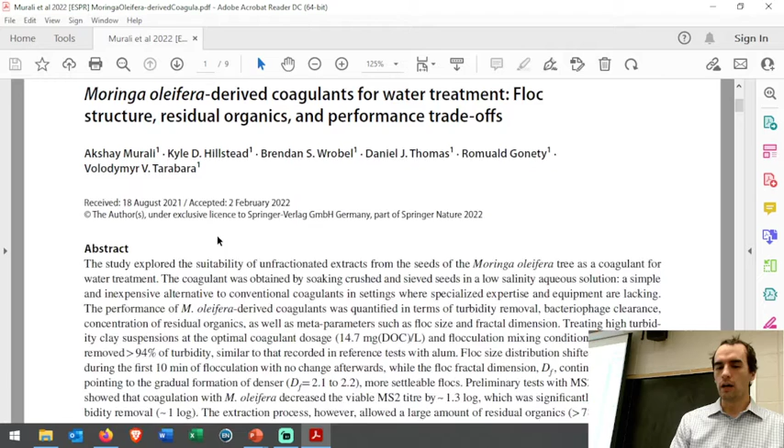I left you with sort of a participation homework assignment to read this article. Part of me wishes I gave you a little more specific instructions on what exactly to pay attention to, but I think I'm going to give you most of the credit just for participating in the quiz anyway, so I don't feel too bad. And also, I think it's a good place to start thinking about how you actually approach literature to find some sort of information, right?

So I talked to you a bit about this stuff in class, but I didn't cover every single specific detail about it. And so maybe you want to know, well, how good at virus removal is it? Is it going to remove any viruses? Is it going to be 90%, 99%? What is it going to do? So you might have that type of question in your mind when you're doing your research papers, and so this would be a great lesson, so to speak, on how to deal with research articles.

And I would always recommend first taking a look at the abstract. You might not understand everything that's there, right? I don't even understand everything in the abstracts when I look through them. That's something that happens very commonly when you're looking at academic research. There's a whole language ascribed to this particular topic. If you get into coagulation, sedimentation, and interparticle dynamics, it's kind of a language set that you have to learn. If you get into some other field, it's a different language set.

You go over to computer engineering. They have their own language set, right? Not to mention computer languages. So if you think about it like a language, it makes sense that there's going to be vocabulary where, okay, I don't know what that means. But by starting with that approach, you can start piecing together, oh, it's referring to something in light of this, so maybe I really need to figure out what that one particular word means.

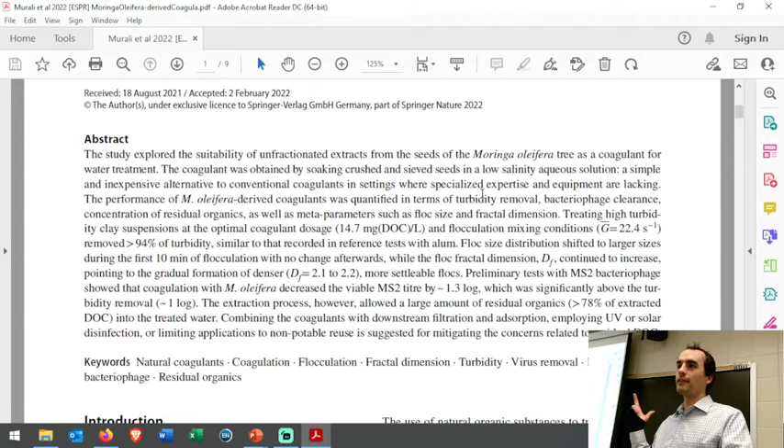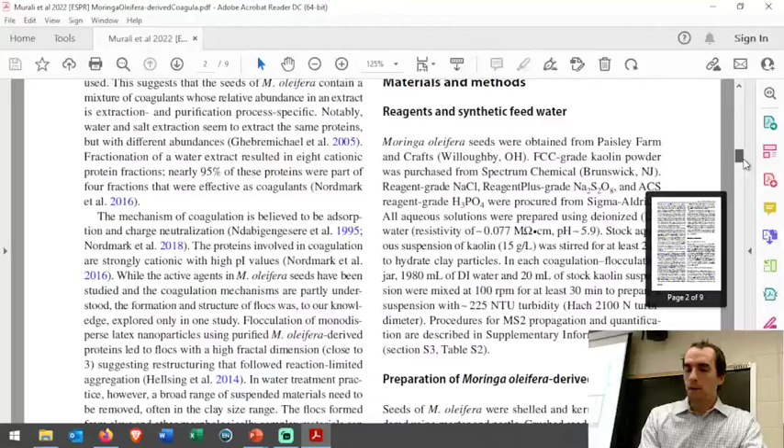Depending on your level of interest, how much information you need out of it, that's going to kind of tell you where else to look. Probably look in the conclusions. It'll expand on the abstract in terms of really what they found. But if you needed to know how they did something, if maybe that's what you're looking for, like, oh, did they use this method, maybe you're working in a research lab and you're trying to figure out how to do something, maybe it's a senior design project, then you probably know something about it already and you're looking for extra help, and then you might check the materials and methods, right? So that might be one thing.

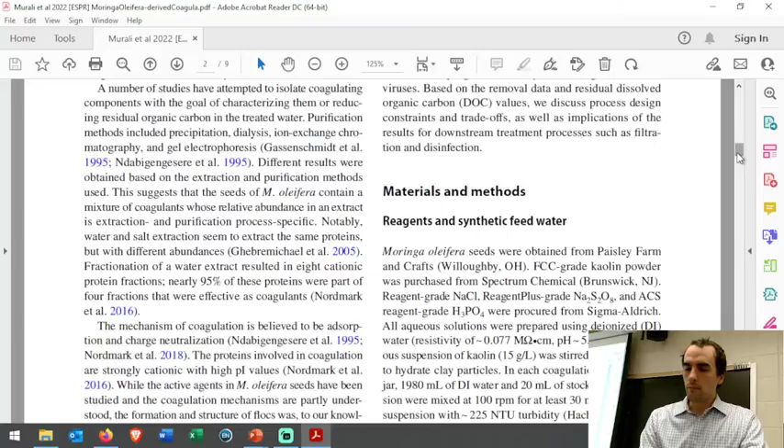For what I was interested in, you getting to understand the system and Moringa stuff, maybe you could extract some info there, but more likely I was thinking you'd take a look at the abstract, maybe the intro for a little more context. Especially the last paragraph of the intro tends to be very helpful to understand really what the paper is about. Typically an introduction, and this can be true for your papers as well, your introduction is going to be context leading up to why what you're going to say matters, right? So you're going to build up the story. This is known, that is known, but researchers really haven't delved into this, therefore we did this paper. That's kind of an introduction, and that last paragraph typically is, therefore we did this.

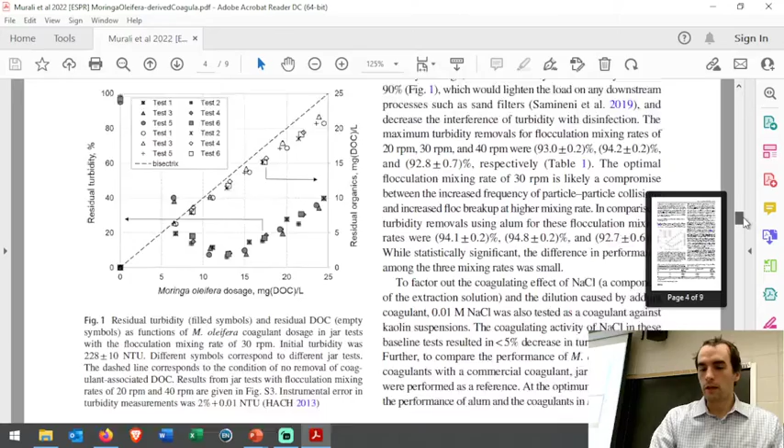So if we look at this, it starts with the present work focuses, so it's context, context, context, now here we are with this paper. You'll see that structure almost every time. So that kind of gives it a little bit more. They talk about a few different aspects of it. And this is kind of my approach when I review literature. A lot of times I'll then go and skip. Maybe I'll scan the figures to see if they mean anything to me right away without further investigation.

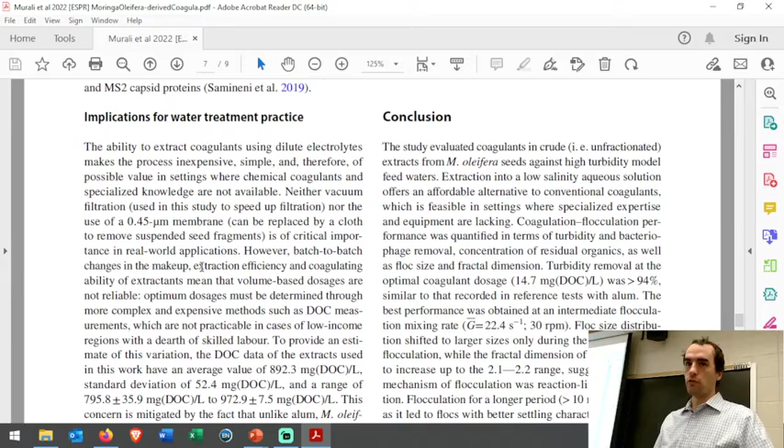And then I'll head down to, typically, the conclusions, and this particular paper also had implications for water treatment practice. So I think both of those spots would have been great sections to focus on, rather than try to read every single word in the paper. Because I didn't tell you not to do that, but I probably should have told you not to do that, because that's going to take a whole lot more energy than is going to be worth your time to extract information out. So you'd be much better served to read parts and then go and look at the other parts as needed to understand more and more. So it's not like a book where you read straight through necessarily.

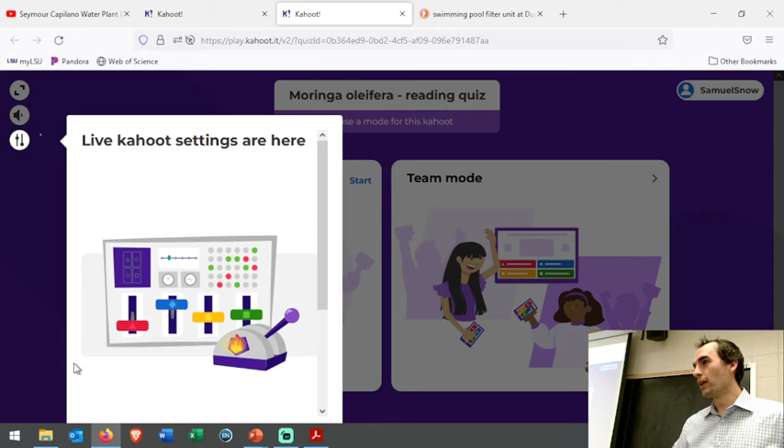Okay, so with that in mind, I'd like to have you do the Kahoot, ask you a few questions, and again, you're getting most of the credit for participating, so it's only a small bit of pressure, okay? Can you just let me do it, please? Okay, so join up with your 8-9 number.

I'll talk more about the research paper and kind of talk about EndNote, some other presentation tips and stuff next time, because your presentations will occur a week from today. So that'll be just short presentations. Here's my thesis statement, enunciate it, tell the class, along with your introduction drafts, right? And when I say introduction, I really mean that introductory paragraph. Will be due a week from today. So you'll submit those on Moodle, you'll come to class and make your statement, give it to the class, and essentially, we'll have you divided into the groups that we selected with the Google Doc, and within your groups, I'll ask you to give each other feedback for certain things about your tiny presentation. 20-second presentation, you'll get a little bit of feedback there.

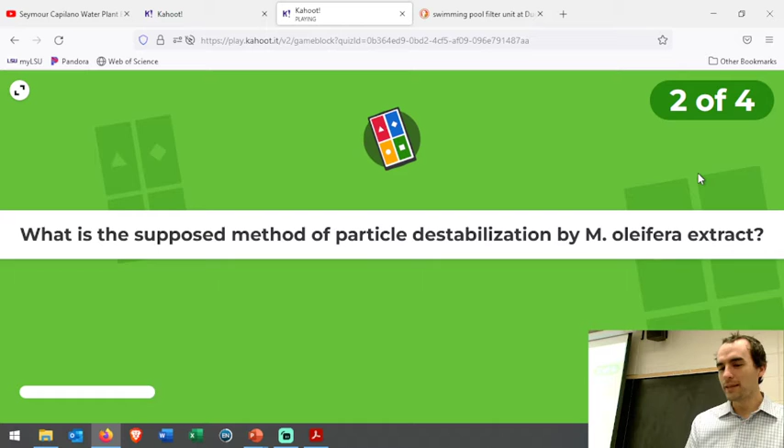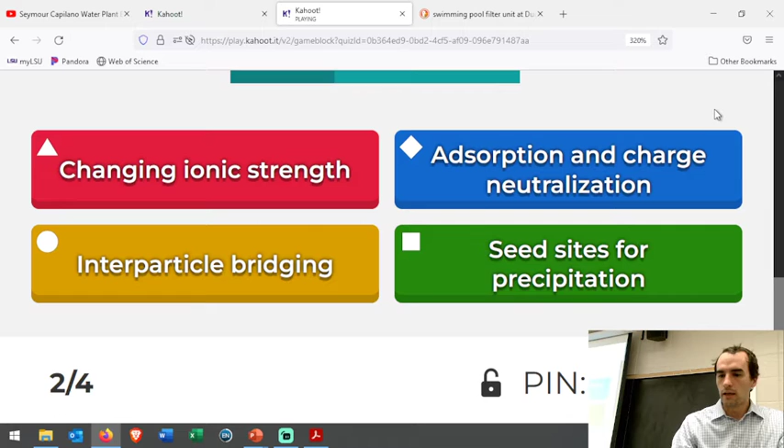No, I'm kidding. Okay, so first serious question: what is the supposed method of particle destabilization by this moringa extract? I'm so sorry. I was trying to make it better. There you go. Okay. First one would be changing ionic strength, adsorption, charge neutralization, interparticle bridging, or seed sites for precipitation.

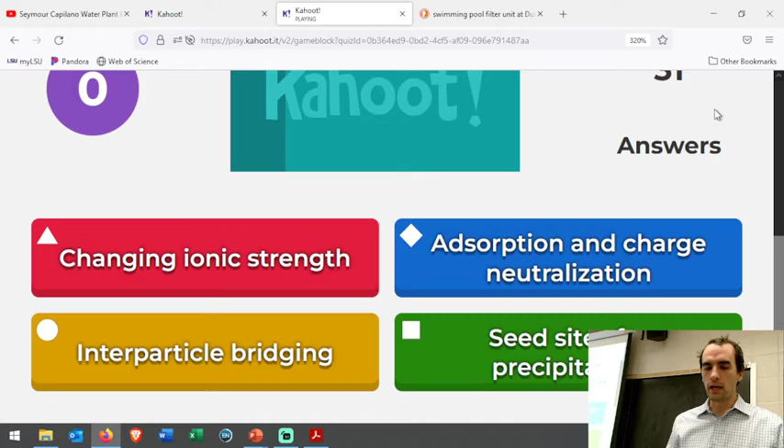Of course, when you're doing your own research on a topic like this, you'll have this question for yourself, and then you'll have to go and find it in a paper, right? So quizzing you on this is a little bit backwards. Hopefully, I can help show you the way of things. But it does look like a lot of you read enough, perceived enough to catch that. So that's excellent. So it was that adsorption and charge neutralization.

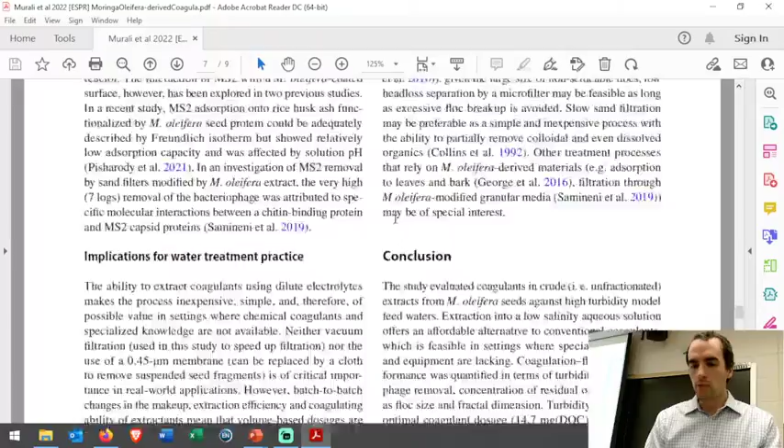If we were to go up to the introduction, you'll probably find it elsewhere as well. But towards the end of the introduction, they were talking about it, and they said the mechanism of coagulation is believed to be adsorption and charge neutralization, and they go on to describe that in a little more depth. Another helpful hint is looking at the first and last sentence of a paragraph can tell you what it's about, at least, and how the narrative is flowing.

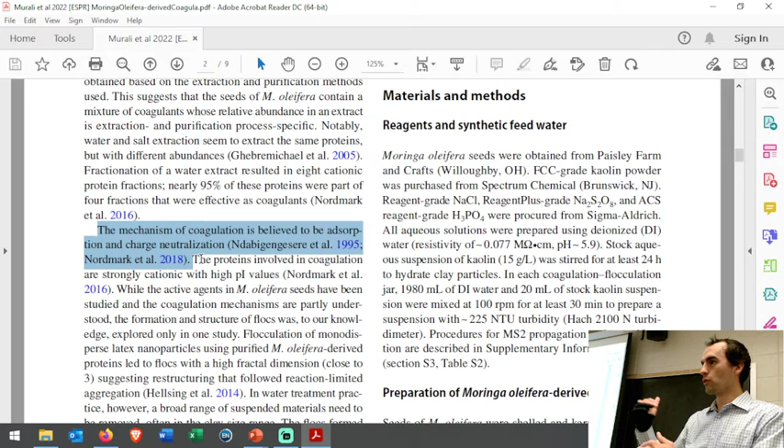That means, by the way, when you're writing, you should try to do the same thing. Try to connect your ideas, connect your paragraphs using those first and last sentences to help even yourself to think about what you're writing about, right? If you start that way and say, okay, this paragraph's going to be about this stuff, and then the next big topic I want to write about that other stuff, that's going to help you fill them out appropriately and make sure they're connected rather than just being random topics here, there, and everywhere.

Okay, I'm going to try to just adjust it now and see if I can get something. Okay, we'll try that.

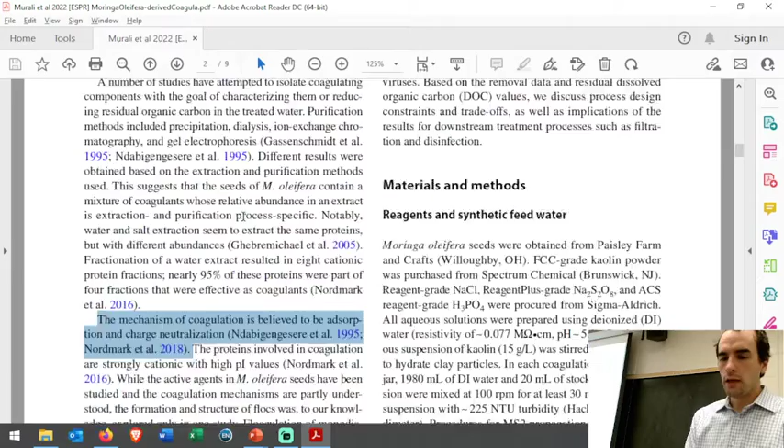All right, true or false? The moringa extract provided removal of over 90% of MS2 viruses. Okay. Answer to this one was true. If you took a look in the abstract, it actually mentions it there in terms of saying decreased the viable MS2 titer by 1.3 logs.

So there's a few terminology issues there, right? So a titer, that means really just the concentration of how many viruses are in a sample of water. The viable, meaning MS2 that you can actually grow if you give them the right host. And then the log here, you guys should know, 1.3 log, a 1 log removal would be 90%, right? So above a 1 log, that's more than 90%. And that was repeated in a couple spots, so that's where you get that information.

All right, last question then. Which of the following is not a concern for the residual organic matter that you end up adding when you're using this particular seed extract? First one would be toxicity of the compounds, then interfering with disinfection processes, allowing regrowth of microbes after disinfection, or last, it might act as a substrate for disinfection byproduct formation. So I'm asking which is not a concern. So 3 out of 4 of these are a concern, according to the paper.

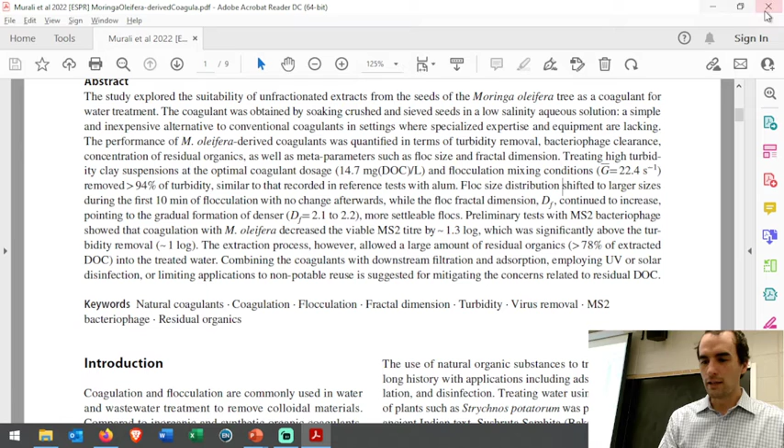Okay, so the correct answer here was toxicity of the compounds is not mentioned really anywhere. Let's see, there we go. So that was the correct answer. The other parts were specifically mentioned as considerations that could potentially be problems, including adding materials for disinfection byproducts. Now, I ought to do my due diligence here and check if the word toxic is in here. It's not, so that's good. Because I assumed when I was reading through it that I didn't see it, and then I was making a quiz, and I was like, okay, I'm just going to assume that wasn't mentioned as a potential issue. It did not lead you astray as I maybe could have accidentally.

Okay, so hopefully that was useful. It looks like most of you got something out of it and responded pretty well there. All right, you can look at the top performers here, whoever you are. It actually doesn't really matter how quickly you answer, it just scores it that way. So there you go, whoever that is. All right.

Okay. So I think I covered all of that. Yeah, so on the 23rd, that's when the thesis statement is due, and your introductory paragraph will be due on Moodle. I'll make sure to have an assignment posted for that, if I don't already, with it dated so that you know to submit that. Moodle will give you a reminder that way.

Any questions or comments about the Moringa paper before we move on? Do you find it interesting? A little bit? Okay. What's that? Similar approach to our senior design project. Nice. Cool.

Awesome. Okay, so today we will talk about that. Oops, don't want a blank screen.

We're going to talk about filtration, and specifically we're going to be looking at granular filtration, and we'll pick up on membrane filtration after we do the presentation and stuff next week. So really what I'm talking about with granular filtration, it's not the same as taking a membrane. If we take a membrane, we have some particle and we want to remove it, so we pass it through the membrane and it gets stuck on the surface, and then you have clean water coming out the other end. So that would be a membrane approach.

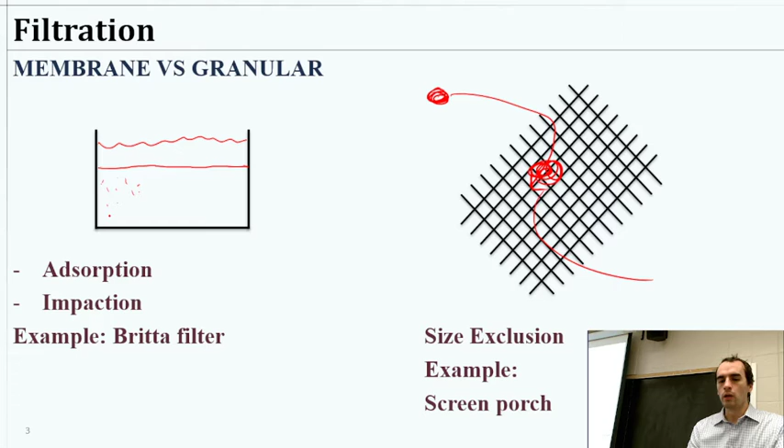That's sort of your coffee filter, right? It's just size exclusion. You could think of a screen porch keeping mosquitoes out, letting the air through, but not mosquitoes, hopefully. So size exclusion is not really the thing we're dealing with primarily. It might happen to an extent for larger particles, but what we really care about for a granular filter system is what happens in groundwater. The reason groundwater tends to be cleaner than most other water sources is because it's made up of soil, some sort of granular media.

Let's say this is a bed packed with sand here. Inside those spaces between the grains, you have all sorts of adsorption or impaction type processes that can occur. When you have water flowing through a porous media in that manner, inevitably a lot of the small particles will stick to these grains of sand or the soil and be removed. So the theory is if we have dirty water coming in, we add it on top, and we'll end up with clean water coming out. So we're collecting particles in the granular sand.

We could do a pre-treatment with coagulation, cause the particles to stick together, destabilize them, then they'll be even more sticky to the granular media. If we're talking about a municipal scale system, of course, we'll do sedimentation first and then follow with this, probably a combination of that and coagulation. At any rate, if we're doing it for a developing context, we really need to think of the scale and how manageable it is and what technologies are required.

So we're going to review the basics of how the large scale systems work, take a look at what a smaller scale unit would look like, consider the cost of transportation, the cost of operation, the skill required, and then think about what you could do in a household to make use of a granular approach. Speaking of households, a Brita filter is somewhat of an example. This is also really focused on the adsorption of chemicals. You've got activated carbon that does a really good job with chemical adsorption, in addition to it being a granular medium.

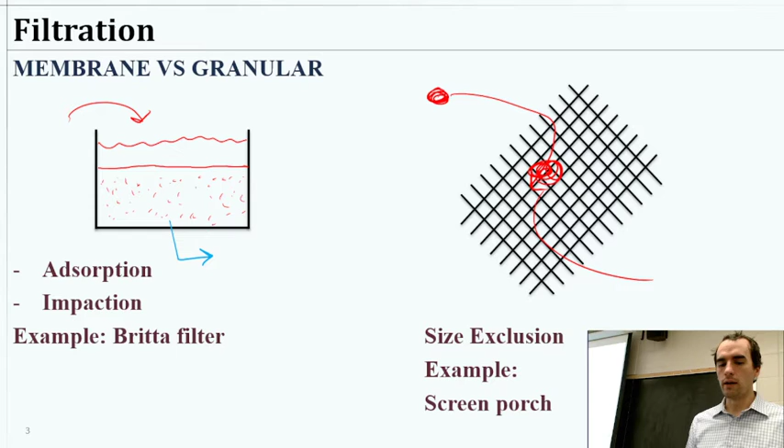Okay, so there's a few things that happen. I mentioned size exclusion or mechanical screening. Not really the go-to approach here. That's not what we're designing it for, in part because that'll block all the pores and then we can't pour water through it. What we want is for the particles to get stuck more on the inside of the granular media, and then it'll fill with these small particles, and then we can flush it out later and dump that stuff to waste.

So we'll have what we might call sedimentation. Inside a little pore area, the particles are just falling slowly as it's traveling through, and it sediments onto a larger grain. You could have flocculation occurring, so particles meeting each other since they're drawn into a small space together, a mixing type of situation where you're allowing particles to meet and grow larger and then get stuck.

You could have interception, where particles moving along contact a surface, hit the edge of the sand grain there and get stuck. So it's intercepted by the grain. Or it could just be that you have impaction. So it's sort of like the sedimentation idea.

Your water's flowing through, maybe it flows through kind of quickly, and then it veers off to the side to travel through the pores, and the particle doesn't make the turn fast enough and collides with the sand grain. So those are the several different mechanisms if we're thinking about the particle movement dynamics. All of those could cause particle removal in a system like this.

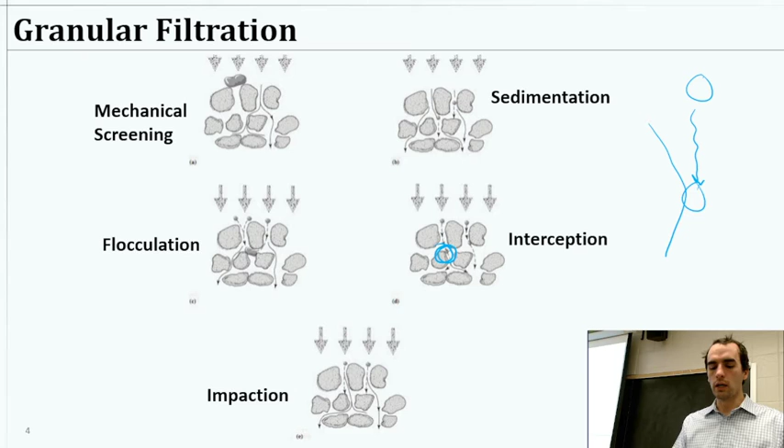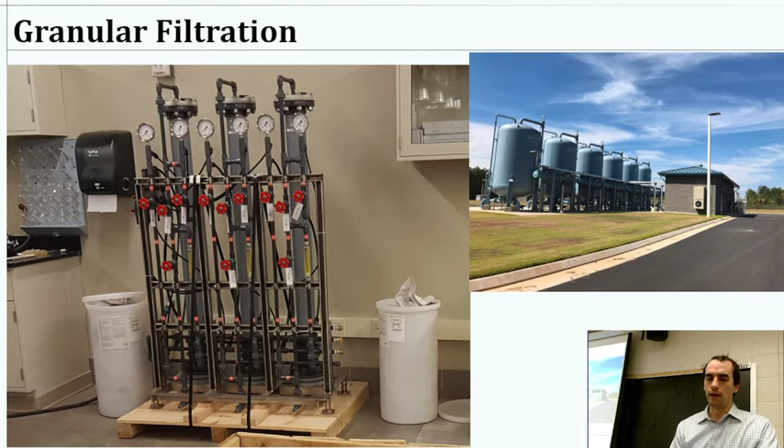So this might be what a slightly smaller scale system would look like, or if we were to think about probably the most commonly seen type of system, at least by the public, just go to Google and look at pool filters, because they're almost always a form of granular media. So when you're operating a pool system, you'll have these big cartridge sort of things, you have some sort of a pump, and it's pouring maybe something like a gallon a minute, or some amount of water. It's not super fast, but it's a decent amount of water, so it's going to filter the pool, maybe a full water exchange in a day or two.

And if you think about it, that swimming pool, that's a fair amount of water. If you're producing that much water for, let's say, a community to drink, that would be a decent amount of water, right? You could probably supply 200 homes or something with a swimming pool every day, if that's the flow rate. So if you were to take a look at emergency response units, which is one of the more common uses of this type of cartridge system, you can put these on a pallet, so you can transport them relatively easily. It's not like you have to make them humongous. You can have multiple cartridges, so if you have to operate them in parallel to have a larger flow, that works just fine. You can take just sand, and then you can have activated carbon, so you can sequence what specifically you're treating, get some control over the treatment that way.

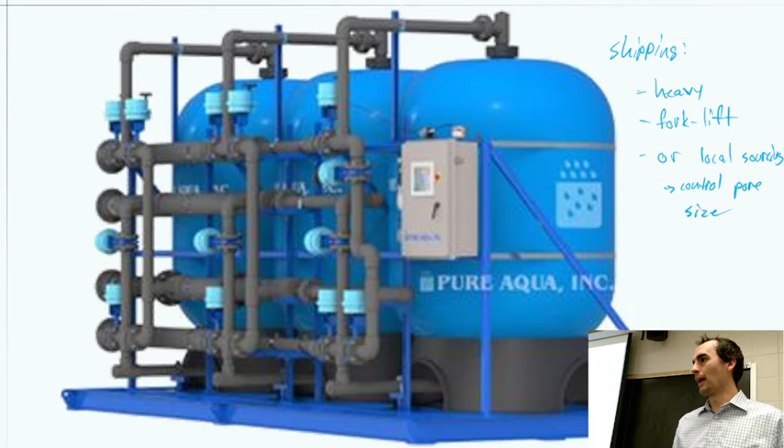Maybe you treat them with heat in kind of a makeshift kiln or something. Maybe that works okay. Maybe that's a better option than nothing at all. So it doesn't have to be exactly precise to have something that works or that helps, right? But if you're going to do a carefully designed operation where you know the flow rates, you know the pressure or the backwash frequency, all of that, you need some more control.

The other thing is, these are always going to require some amount of energy, at minimum, to add water on top of your bed. So if we take a look at it in practice, in sort of a municipal scale system, you're essentially adding water on top of the media bed, and then you're using gravity as the force to push water through the media, because there's going to be some resistance there, right? So in this case, you add water on top, and it fills to a point where it's going to flow through at some rate.

Should have learned all about that in 3110. It's just gravity. So if you're taking that approach, you're going to need either a pump to do this, or gravity, but you're also going to need a pump for backwashing, because eventually the sand and the grains get clogged up with all the goo, all the nasty stuff, and you're inevitably going to need to backwash it.

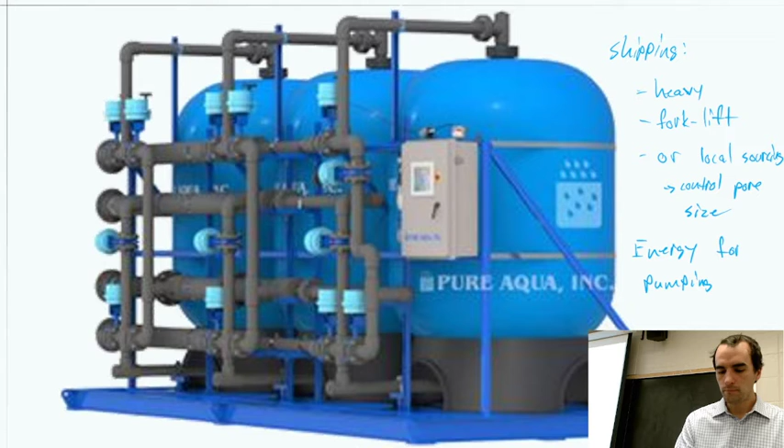We can talk a little bit about the mechanics of when and why to do that and review that. So that would be the other concern, energy for essentially pumping. So you need electricity or some other way of providing mechanical energy to move the water about. Maybe you could do that with a water mill or something clever like that, but you certainly are going to need the ability to adjust the plumbing to backwash when necessary.

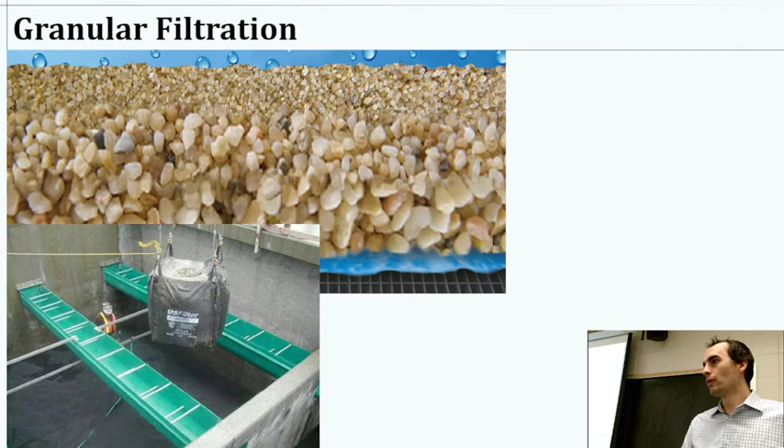And essentially, this guy here is working on filling this media bed, and that's something like a cubic meter of media, and it's being lowered in on a crane. And if you do some calculations, you'll realize that's a lot of media that's going to fill that bed, and that's very heavy. So it's very important that this stuff is reused. One of the great things about granular filtration is it's pretty much infinitely reusable as long as you're backwashing appropriately. Okay, talked about that. Kind of an example there.

People have been using this for quite some time. We mentioned groundwater, so just a bit of history on the technology. Back in the 1800s, people started to do what we would call slow sand filtration, really giving enough time for biological activity to consume waste products. So that's mostly wastewater treatment, or potentially biological treatment of a gross water source that you needed to drink from. Not a very great thing, but it's going to act like a groundwater system just done on purpose.

Since then, we typically use what we call rapid sand filtration, which is what we just talked about, applying enough gravity and having enough control over our pore sizes and enough backwashing to make sure that we can get pretty rapid flow through and get all those particle removal goals accomplished.

Okay, so then there's a few terms we talk about when we're talking about operation, which would be filter ripening. I mentioned that first few minutes of operation of a new clean filter, or maybe the first couple gallons you filter in your Brita filter, you get those black particles. That's just kind of your media coming out when you were hoping that it would stay in there, right? So you just need to flush that out for a little while because you have some particles escaping.

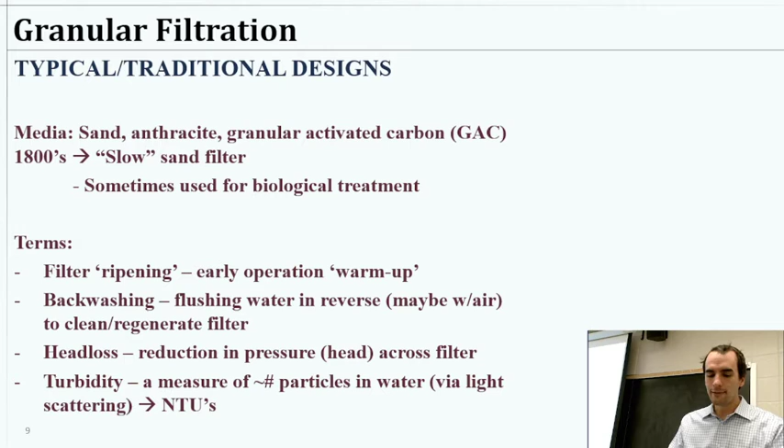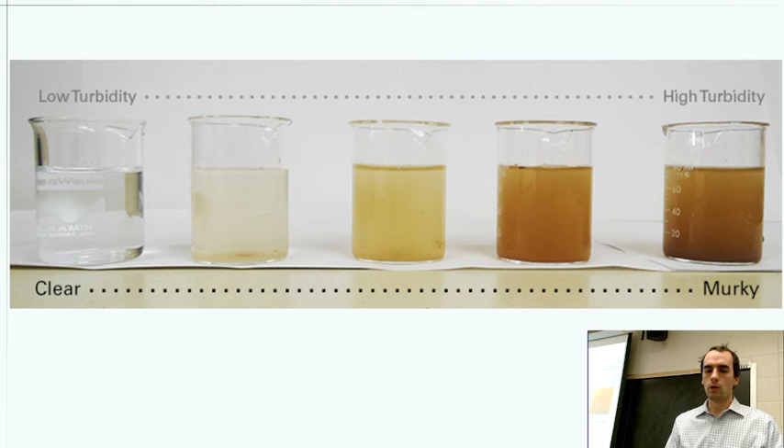For some municipal systems, maybe a time frame is reasonable. Every 72 hours, they take the filters offline and backwash them. That's not necessarily practical, so as we think about it, okay, turbidity, we know all about that. Essentially, you just want to monitor that in your treatment before and after, and monitor that over time to see, okay, after how many hours, maybe at some point it gets to this color or slight, something like that, then we know we need to backwash, because it should be producing clear water and it's got particles coming through.

So interesting ways to measure turbidity. If you're measuring it in kind of a natural water system, you have these Secchi discs. Essentially, you're just looking at how much light is being scattered by the particles in water. So the further you can see a disc like this and distinguish between the black and white sides of it, or edges, that's lower turbidity. So the further you can see. So we can have little light measuring devices that essentially do the same thing and give you a good estimate without all that involved.

Okay, so then determining the backwash frequency, essentially what we want to do is take a look at the different methods. If we're operating some sort of filter and we monitor the turbidity, what it'll probably look like as a function of operation time is, if we say we just cleaned the system and we start filtering water through it, the first few minutes, maybe 20 minutes, essentially what we usually do is we usually say, okay, above this amount of turbidity is unacceptable. We know the filter can produce better water than this, so anything above some line is kind of unacceptable. So this might be our cutoff. The first few minutes right after cleaning are probably going to be above it.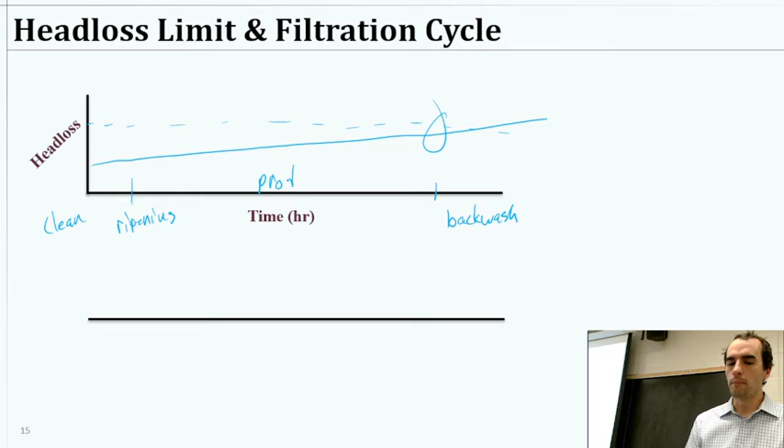So that's the way we can think of a filter. So any granular filter is going to have some set operation cycle where we have that rinse. That's usually going to be something like 20 minutes. It really depends on how much water, how quickly you're pouring it through. We're going to have production. Generally, that's going to be something on the order of a few days, 24 to 72 hours, something like that.

So the majority of the time, hopefully, is production phase. And then at the last bit, we're going to have backwash. And hopefully that only takes about 20 minutes as well, something like that. But again, depends on the system. If you have a low flow scenario, maybe you operate longer, maybe it takes longer to rinse and backwash. This is really kind of typical for municipal scale systems, which will also hold true for kind of pressurized systems that you might take for disaster relief.

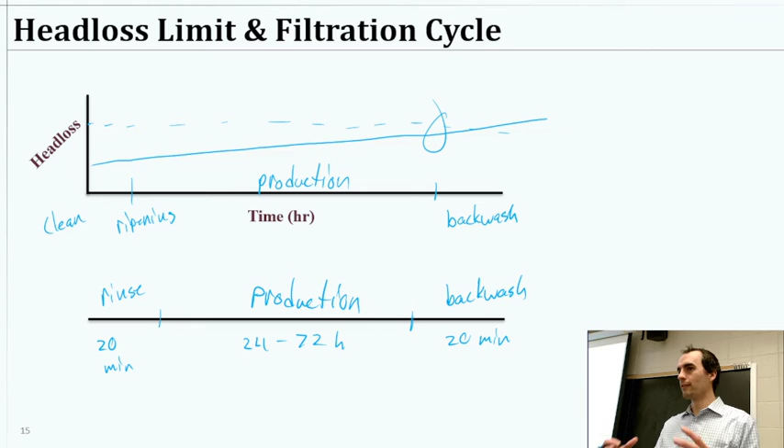Okay, so I like to show videos, so I often show this one for the backwashing process. I'm going to turn my volume on, but keep it pretty low, and I might mute it at some point because it gets really loud when they do the air purge.

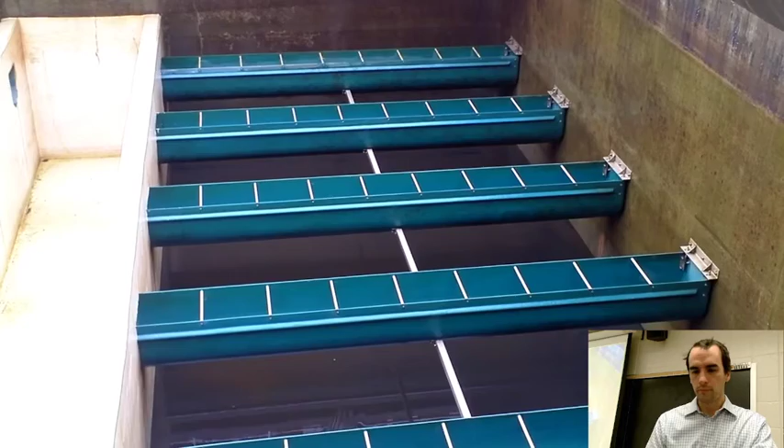Okay, so they've got a granular media system here that they're about to start backwashing. You can see we're starting with an air purge, and so all those bubbles are kicking up this water. And this is a municipal scale drinking water treatment plant. So this is seeing all that nasty, nasty water that's all collected from the filters that are treating water, and that's what's being caught. I'm going to fast forward a little bit because that just bubbles for a little while.

Eventually they stop the air, and then they purge it. I'm just going to go ahead and mute it. Yeah, I'm gonna mute it. Oh wait, wrong way. Kidding. So that's loud and uncomfortable, obviously.

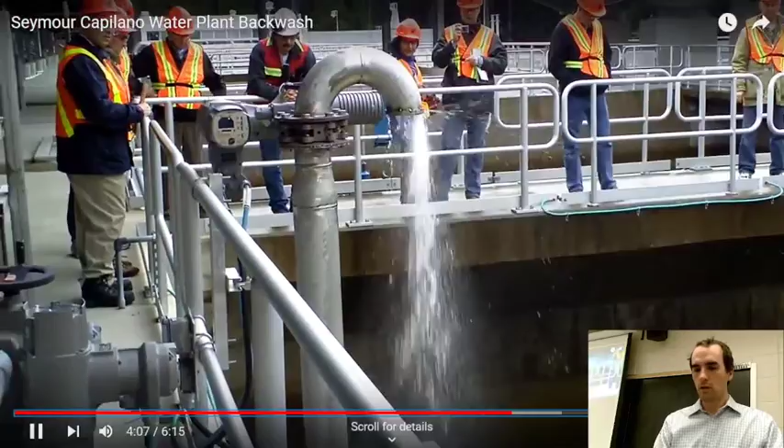They're just priming the pump so that they can get the air out of it, so then they're primed with water, so then they can push water up through. So it takes another couple minutes. Well, another few seconds anyway. Okay. So they got their pump primed, and you see they actually have a pair of filter beds here, just kind of focusing the camera on one. It's pretty common to operate like that with a trough between them to collect or to distribute. So collect the backwash or to put clean water through or water to be treated through there.

Okay, so now they're starting, I think, to push water through. So we see a lot of air bubbles escaping. Water is rising a bit. Okay, they fast forwarded. And you can see the delightful, I think somebody makes a comment in one of these videos like, you ever wondered how root beer is made? So, I mean, technically most of that's just soil particles and stuff, right? So it's definitely gross, but at least it's not like wastewater gross, right?

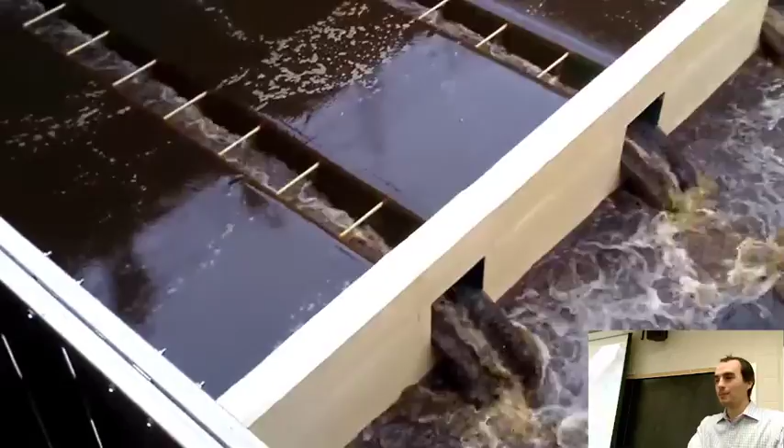But this will be treated. Most drinking water treatment facilities have a wastewater discharge permit of some sort, because a lot of times they will then have a separate process, to answer your question earlier. That's a lot of water that needs to go to waste, so they're going to have that waste product. They're likely going to do sedimentation, possibly some biological treatment, and then discharge. If not, then they're going to be paying the wastewater treatment system to take their waste.

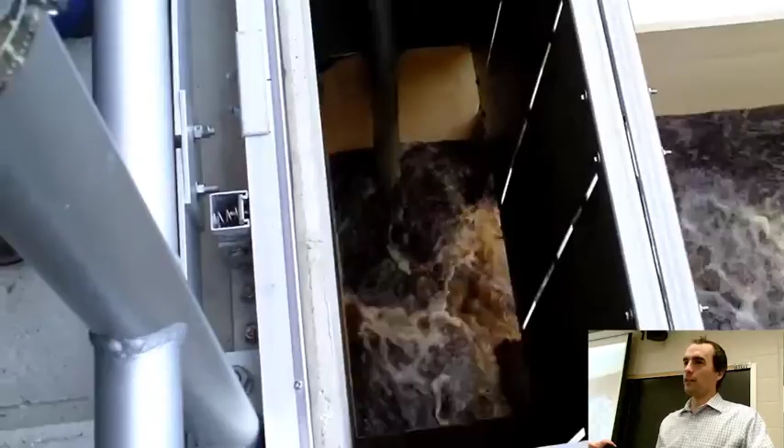But typically you've got the operators, you've got the skill, you've got the facilities for the most part, and all the control systems you would need. So a lot of times it makes sense just to treat on site. Okay. So I wanted to share that with you real quick.

The color is interesting. Sometimes I'll go on to the next one or whatever, and you'll see different treatment plants doing backflush, and sometimes it's very orange, maybe if they've used alum as a coagulant. In Louisiana here, most of our water systems have lots of sediment, just from the Mississippi River Basin, so most of our soil is really sediment that's accumulated and been transported from kind of north in the country, so it's a lot of fine particles, kind of a dark soil.

When I was growing up in Georgia, we have a lot of clay. So Georgia red clay is like this kaolinite stuff, and it's red or orange. And so treatment systems there, probably from the natural water, would be like an orange-brown type of a color for their effluent or for their backwash like that. So it really kind of depends on what stuff you're treating. It'll collect a particular color.

Okay, so what about household scale treatment using a granular type approach? We mentioned Brita filters. Those are nice to make you feel good about your water, but that's not really a treatment for pathogens, right? We don't do that to treat pathogens. Maybe we do it to remove some chlorine. Maybe we do it just in case there's some sort of other organic materials that you don't want. Maybe you just like the taste better, or maybe it's a placebo effect. Whatever it is, it's not really doing pathogens for you for the little Brita filter.

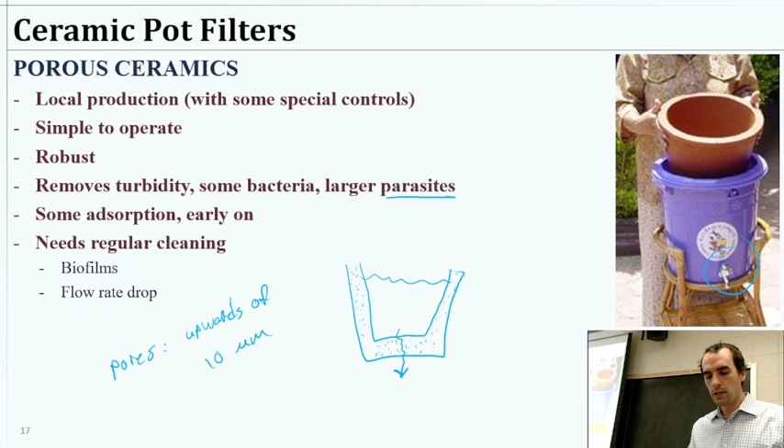I don't think it's a be-all, end-all, or completely sustainable solution. People have added silver to them. So if you add silver, maybe colloidal silver particles to the ceramics in the process, you can get them stuck on there decently well. And we know that silver has kind of an antimicrobial characteristic to it.

And there's some debate about if the silver surface itself, since you can have a bit of a positive charge on that surface, can disrupt bacteria and essentially ruin their functions, cause them to die. Or maybe it's silver ions that are released into solution, and those are what's causing the antimicrobial property. So in either case, we do have silver ions leaching out into the water.

There's a little bit of toxicity for silver, for humans even. It's pretty low and really would require more than what you would even want to add to a ceramic pot filter because of the price. Because obviously we're looking for a cheap intervention here. A very small coating or deposition of silver colloids would be pretty cheap because it's really a really small mass.

So you can have a good antibacterial effect that way, but there are some questions about, okay, how long does that last? Does it get fouled up by some organic matter and then it does nothing? Should we be concerned about that toxicity? What kind of pros and cons here? So it seems like that's probably a decent solution to add to it to make it a little more effective against bacteria, but personally I don't think I would count on that. I think other technologies may be a lot better.

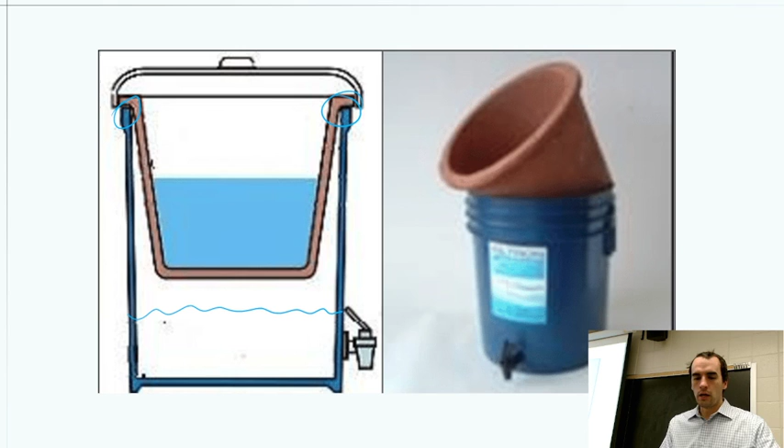And then secondly, they have to recognize that you're going to have to put water in here and let it drip through and strain through that for hours before you can use it. So if you want it for dinner time, you start in the morning and you maybe just periodically add more during the day. So one family might need 1 or 2 pots just to comfortably have some water when they want some water. So a few issues here, but certainly something that's better than nothing.